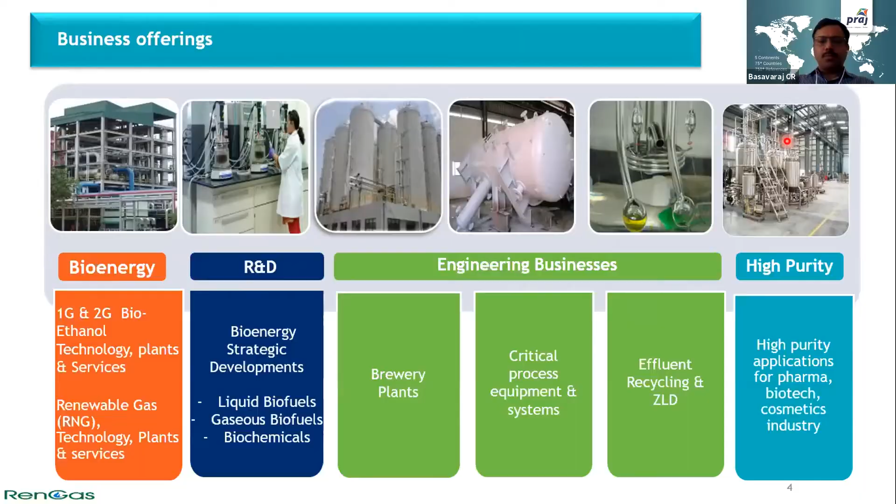All these business units are supported by the Praj Matrix R&D Center, which is a DSIR certified R&D center with more than 25 to 30 million in captive investments. This is the first of its kind R&D facility, where we have bench scale, pilot scale, and demo scale infrastructure available for the process technologies which we commercialize.

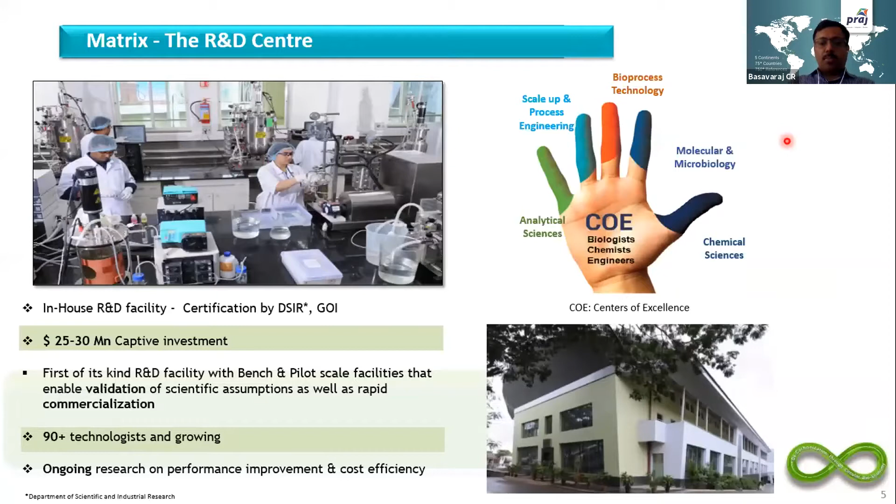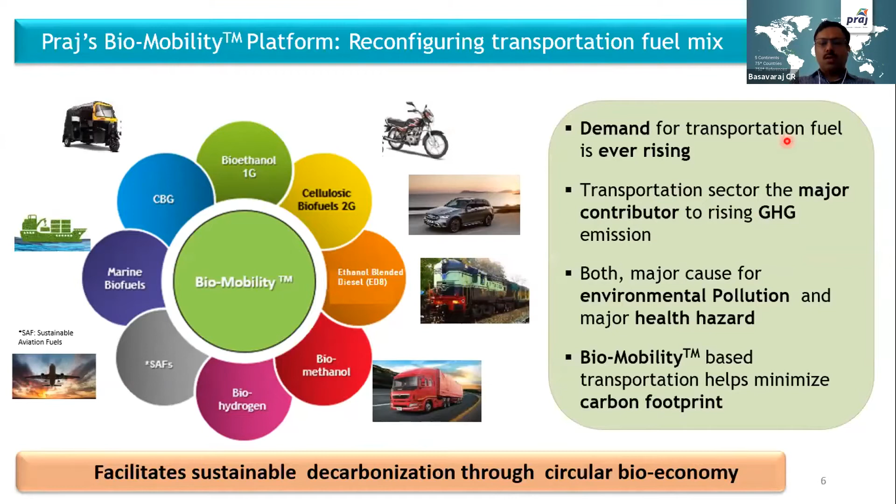Praj's BioMobility Platform - CBG is part of the BioMobility Platform. Likewise, as you know with e-mobility, biomobility plays a vital role where there is a direct contribution of biofuels to the transport sector, which can reduce the carbon footprint, so there's minimum GHG reduction. Other than CBG, other biofuels like bioethanol, cellulosic 2G ethanol, biodiesel, and SAF - sustainable aviation fuel - these all come under the biomobility platform, which will facilitate sustainable decarbonization through circular bioeconomy.

So with this, entering the subject - compressed biogas plant from the sugar industry, especially we are talking about press mud, bagasse, and spent wash. As Sanjay Patil already briefed about the economics and everything about it, one thing I would like to say is that raw material availability is key - to set up any industry, the first primary requirement is availability of raw material at one single point.

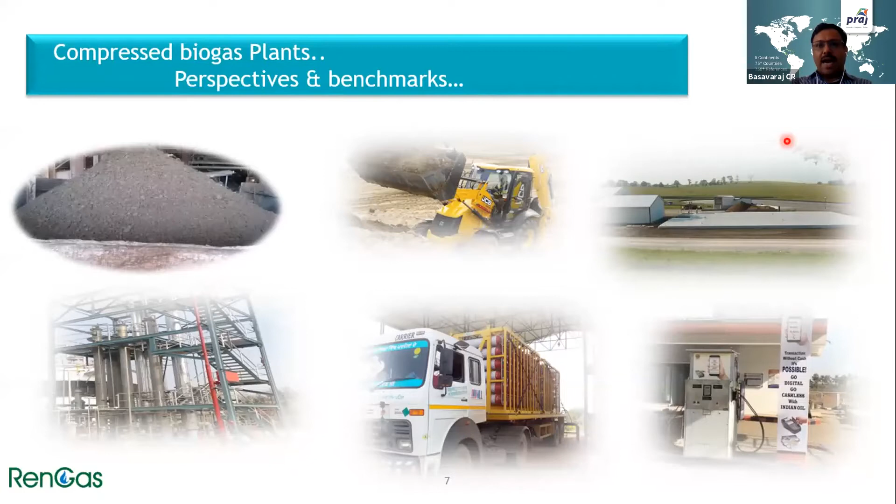In other cases, like when we talk about agri residue, municipal solid waste, or cattle manure, the raw material is in a scattered form. When it comes to the sugar industry, the raw material availability is at one single point location. So we feel that sugar factories and distilleries attached to sugar factories are sitting in a very good position to set up or go for such projects.

Along with press mud treatment, we are also working on other biomasses like bagasse, rice straw, wheat straw, and so on. If you look at the overall potential available, it's about 60 million metric tons including all organic residue. Out of that, about 5% is coming from distillery spent wash and press mud, and another 20 million metric tons of CBG production can come from agri residue.

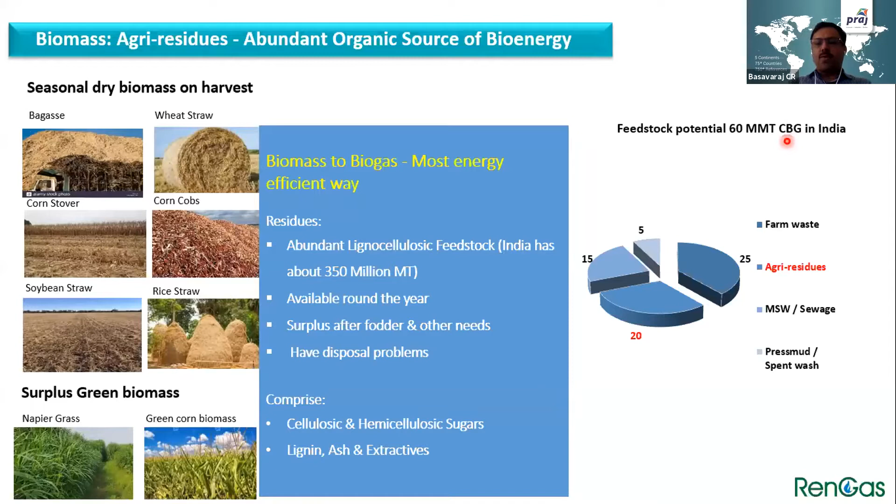When we bring it to the industry, it has to be customized. It has to be high yield. Whatever asset is used, it should give the maximum output. These are the important criteria when we set up an industrial scale biogas plant, followed by purifying and taking it to a CBG grade.

As you all know, we have focused on four unit operations. One is pre-treatment, preserving the organic content present in the press mud through our proprietary microbial culture. The second part is the biomethanation process, where we offer a plug flow reactor which has a distinct advantage—I'll cover it in the subsequent slides.

Once the biogas is produced, the purification of biogas is equally important. I'd like to bring a correlation with your existing distillery setup, since you're familiar with that industry. The biomethanation process is like a fermenter—once the dilute alcohol is produced with maybe 8 to 10% alcohol, we need to purify it to bring it to the ethanol specification of 99% concentration. The purification of biogas plays an equally important role in this case also.

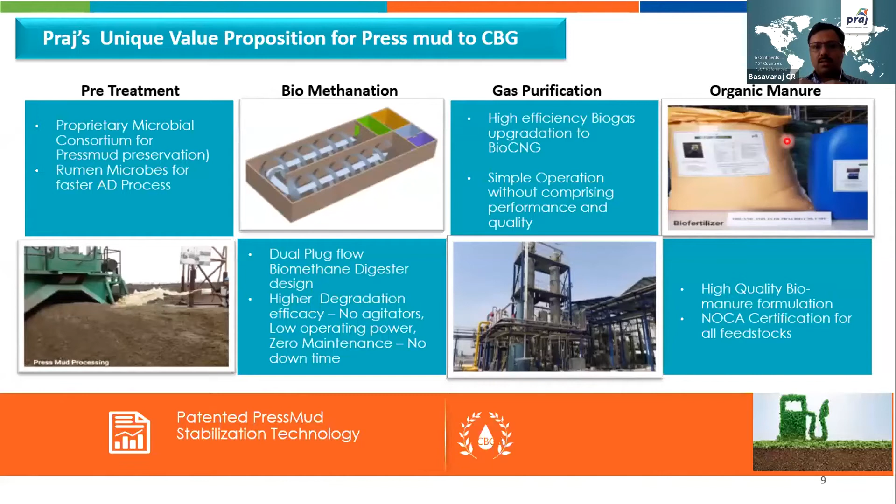Likewise, once the biogas is produced, in Western countries or Europe these biomethanation plants are also called fermenters. In a similar way, after biogas purification, the one more co-product which comes out of the digester is organic manure. This organic manure formulation or fortification to increase its value plays a vital role in making these CBG, press mud to CBG projects economically viable.

As I said, the press mud is a perishable material. In India, sugar factories operate for about 150 days—now we hear it can go down to even 80 or 90 days. So it becomes very important to preserve the raw material throughout the year for 360, 365 days of operation, because this biogas plant operation is continuous, since the CBG production or consumption point is fixed. We have to run these plants for 365 days. In such a scenario, raw material preservation is very important.

For that, we have a patented PM Stab process, where the volatile content and organic matter of the press mud is kept intact, and it gives a consistent yield throughout the year.

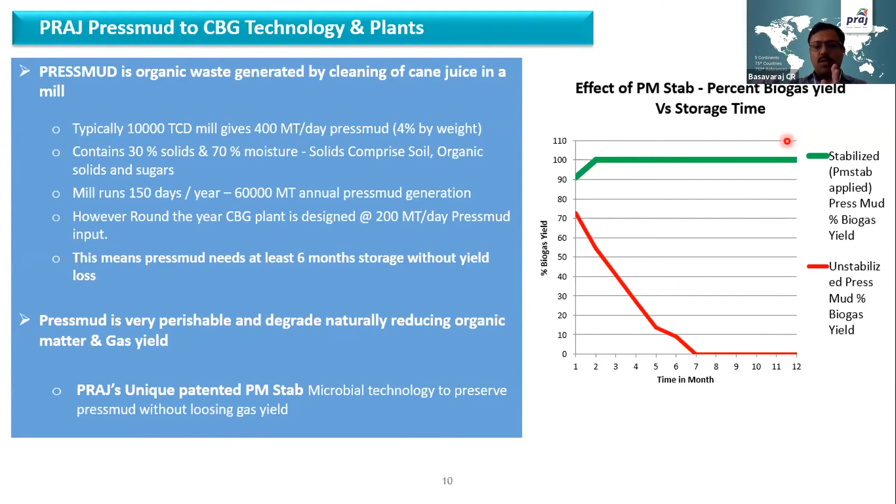Coming to the next unit operation in this CBG plant is the biomethanation process. There are 2 to 3 types of reactors, which my previous presenters have already explained. We are focusing on the plug flow reactor, where, according to us, it gives a distinct advantage over the conventional process—the HRT of the reactor can be kept constant and the conversions are much better. Also, there are no moving parts.

If you can see, it's like a swimming pool, and the raw material entering from this point will pass through the first reactor, then goes to the second reactor and exits. In a biomethanation process, there are two major distinct reactions happening: one is hydrolysis and acidification, which requires different process conditions like pH and temperature; and the methanogenesis process requires different pH and temperature conditions. This can be easily achieved in this kind of reactor.

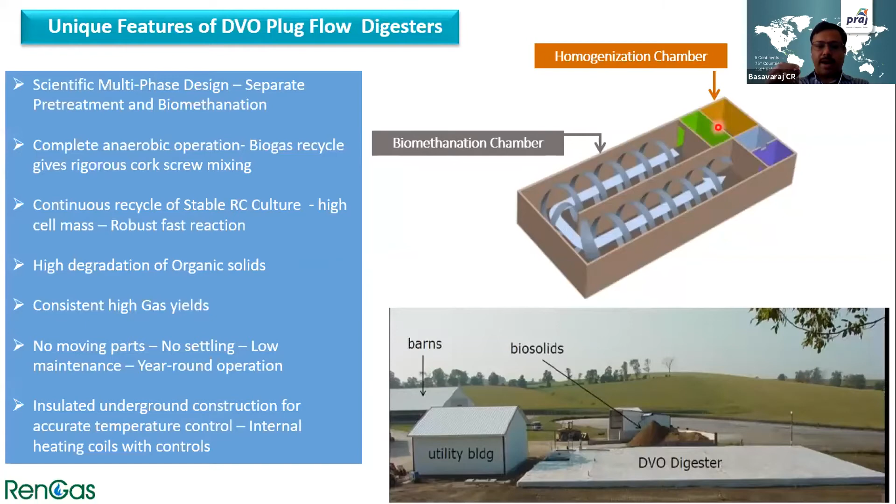As I said, we can have a constant or targeted guaranteed retention time possible in these kind of reactors. With this, the mass transfer efficiency is much better, and the conversion of organic matter or the volatile solids present in this feedstock can be converted for better gas yield.

In this graph, you can see: in case of the plug flow reactor, you can achieve a targeted standard HRT, whereas in other conventional processes there could be a varying HRT, which might result in lower biogas production. There is also a possibility of short circuiting happening in this kind of reactor.

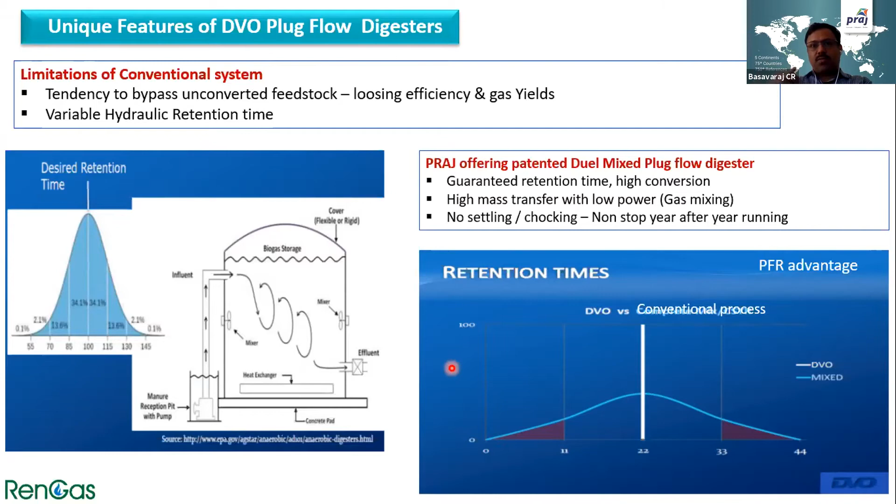So that's the reason we felt that this kind of plug flow reactor will give a better yield and will work very well for this kind of press mud substrate, or maybe press mud mixed with bagasse or any other mixed feedstock, and even for biomass.

The next process, as I mentioned earlier, is gas purification, which also plays a vital role, because the gas produced has to meet IS specifications for OMCs or oil marketing companies to buy and sell it, or if the sugar factory wants to use it for their own tractors and trucks, it still needs to meet IS specifications. So selection of gas purification plays a vitally important role.

We have come up with a different H2S scrubbing process where the chemical can be regenerated, a catalytic process where the chemical can be regenerated, and a chemical H2S scrubbing process, followed by removing the CO2 from the desulfurized biogas.

This can be done either with the chilled water scrubbing process or with the membrane-based CO2 removal system, where recoveries can be achieved more than 97%, meeting IS specifications of more than 90%, or in case there are no other impurities, as high as 96% methane can be achieved.

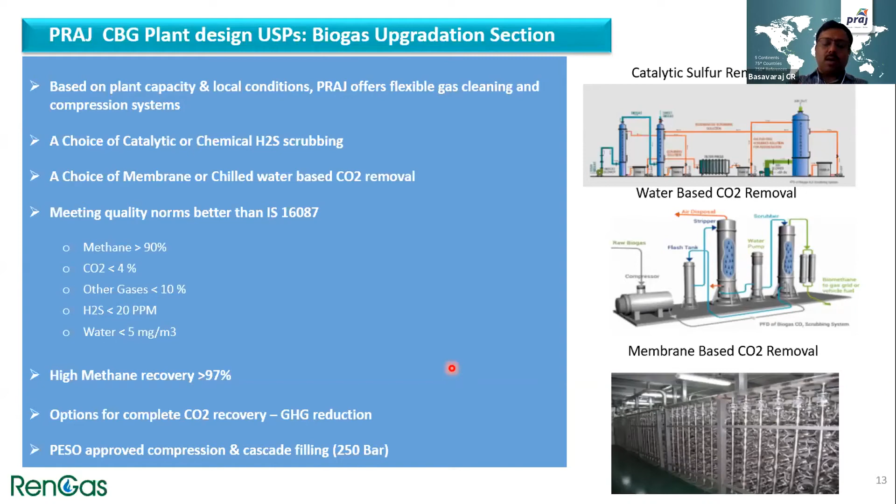The co-product which comes out, the digestate from the digester, is subjected to solid liquid separation, and the manure which comes out is NOCA certified.

The previous speakers already mentioned the importance of it, and it plays a very vital role in the economics of CBG projects. It contributes about 15 to 20% of the revenue in the CBG project.

With this, we can further fortify the manure by adding a few microbes or nutrients, so it can fetch a better value. We are all experiencing a lot of news around us about organic farming, which improves soil characteristics and helps soil fertility. Under such a scenario, this BioGreen NOCA certified manure helps a lot.

One more point I'd like to highlight is that the soil fertilization process requires higher inorganic content in the manure. So our previous processes, like biomethanation and even pre-treatment, ensure the complete or maximum conversion of organic content into biogas. So we have less organic content present in the manure, which is more beneficial for organic manure to be used in the fields.

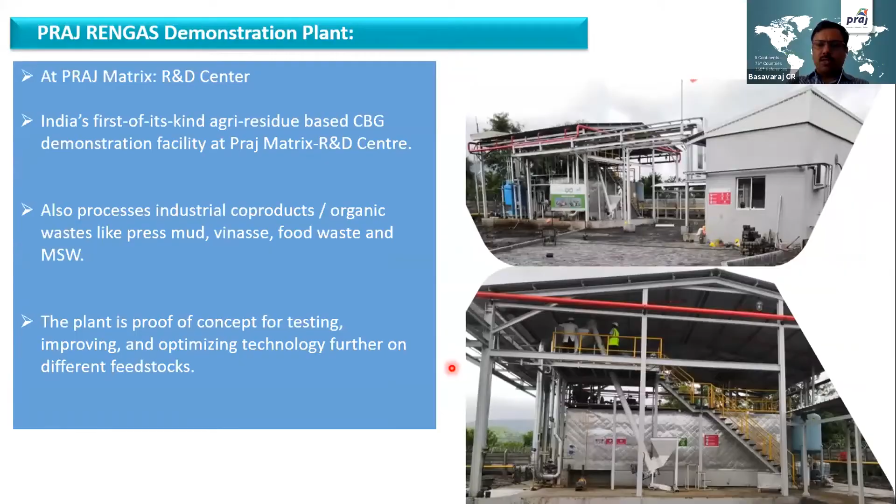We would like to give you a little background of our track record. We have set up almost more than 40 biogas projects in India and abroad. We have good experience operating these plants - though this plant looks very simple, there are a lot of critical parameters to be monitored and operated, and it needs expertise. We have built the largest plant in Thailand and India, where the biogas produced is about 5,000 nm³ per hour, which contributes to close to 40-45 tons of CBG equivalent.

Next, this is all about spent wash based biogas plants. Now we are talking about press mud based or rice straw based CBG plants. We are executing two projects on press mud based plants, and we are executing a rice straw based CBG project for HPCL. We are also working on spent wash based biogas purification to convert it to CBG.

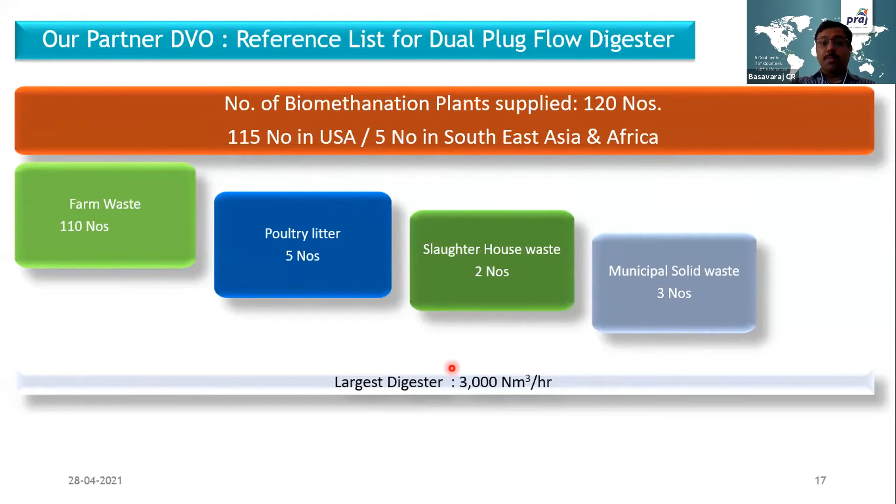This is our partner, DVO Inc. from the United States. They have a reference of about 120 plants in the US, Southeast Asia, and Africa. The largest plant with solid feedstock or farm waste is about 3,000 nm³ per hour, which in terms of Indian conditions is close to about 30 tons of CBG final product. I'm just trying to correlate this.

These are a few snaps of our Indian Potash Limited Muzaffarnagar plant, which is under commissioning, with a feedstock of about 200 tons of press mud processing. We are also working with Leafinity, the Nirani group, where 200 TPD press mud is being processed, near Bagalkot, Karnataka.

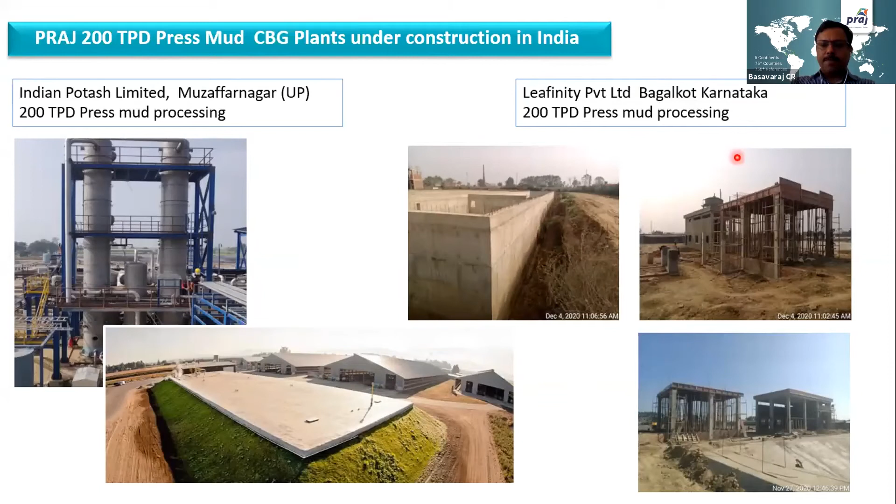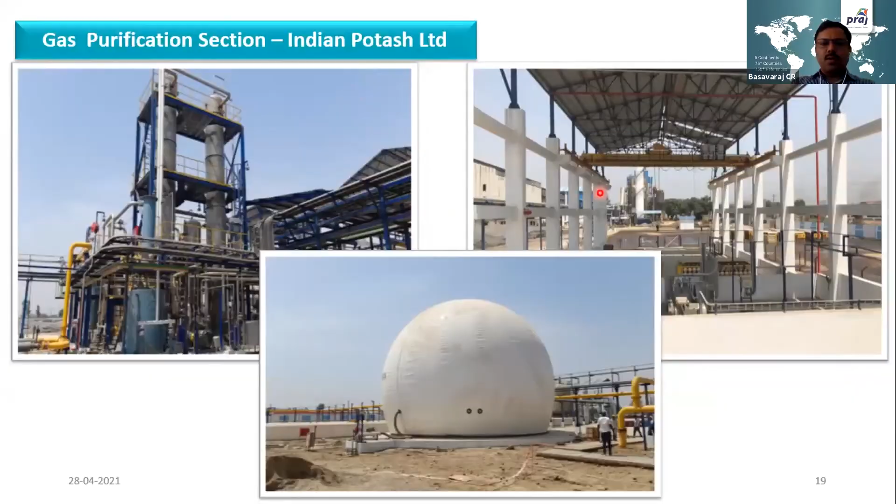This is the biogas purification, storage, and the cascade filling photos. Just finally, after the biogas is purified, the gas is ready to use as a gaseous fuel for vehicles. So compressing, filling manifold, cascade storage area, transportation, and then to the CNG filling station, and then finally using it

in the vehicle. So in summary, what is critical for this press mud to CBG plant or bagasse to CBG plant is that pre-treatment of the raw material is very critical. A highly efficient biomethanation process is critical, and then a robust biogas purification system. Because though the H2S content in this kind of feedstock could be up to 5,000 or 6,000, there might be variation in this feedstock. So your desulfurization of biogas should be robust enough to handle this variation.

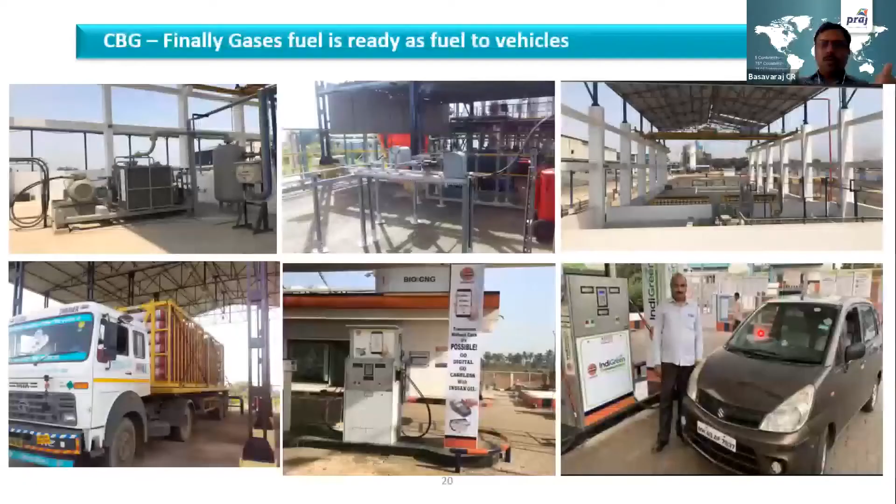And the last one is the organic manure, or fortification of it to further improve the value of this organic manure. So with this, I would like to complete the technical part of this presentation, and I would request forums or bodies like STAI to make the interventions required to accelerate the SATAT program. The SATAT program was launched 2.5 years ago. But there are some hitches or bottlenecks which, with the help of associations like STAI, we can overcome. The 100% offtake is not there.

Maybe a take-or-pay arrangement, like in the case of ethanol, has to be made mandatory for this sector to grow further. The FCO notification for liquid manure is still awaited. It is under discussion, but we have to take it up. And extending the MNRE subsidy till 2025, or making it mandatory for the first 100 projects or maybe the first 500 projects. Offtake of solid manure or liquid manure with a fixed MSP is required.

And when a lot of investors or project developers are coming, wanting to buy press mud and set up plants, indexation of floor pricing of raw materials has to be made mandatory. And when it comes to rice straw and all, if there is a variation in the raw material price, the project viability or project economics will go for a toss. So these things have to be fixed.

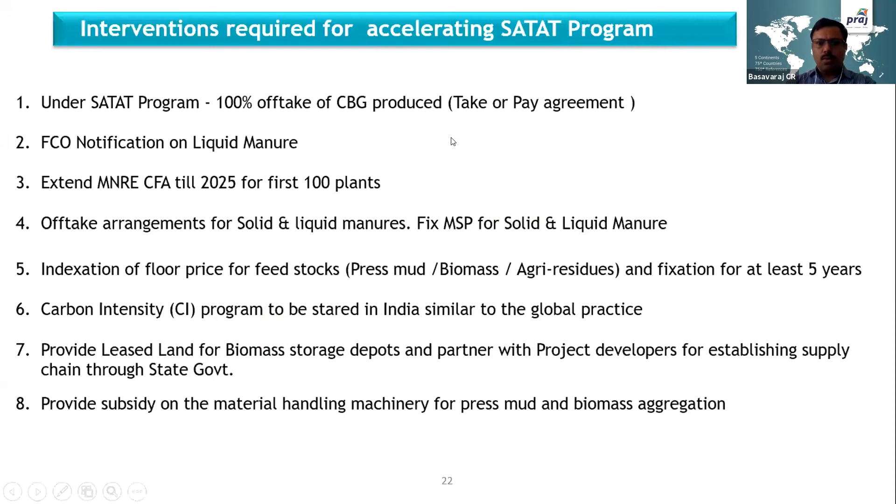And providing a subsidy for the material handling equipment required for press mud and biomass aggregation. A lot of front-end loaders and tractor trolleys are required. So the equipment required for this kind of machinery has to be subsidized to make these projects more attractive. So with this, I conclude my presentation.

Thank you. Thank you, Mr. Basavaraj. On behalf of STAI, we assure you that whatever points you have raised, we will take up with the government and try to move ahead. The government SATAT program has already been introduced for all of us, and the government is very positive in giving us a good price for CNG. Our last speaker, Dr. Sanjay, has already said that the ROI is only 1.77. So I think with the present price of CNG, the ROI will definitely be good.

One question I just want to ask you: the digester which we are going to use for press mud, can it be used for other raw materials, like you said, rice straw, wheat straw, corn shell, or grain distillery vinasse? Can we use the same digester for all these for producing this CNG?

Can you highlight this? Yes, sir, we can use it, because this will help us avoid the storage of press mud for the off season. So in the off season we can use other materials instead of press mud. Is it possible? Okay. Yeah, it's possible.